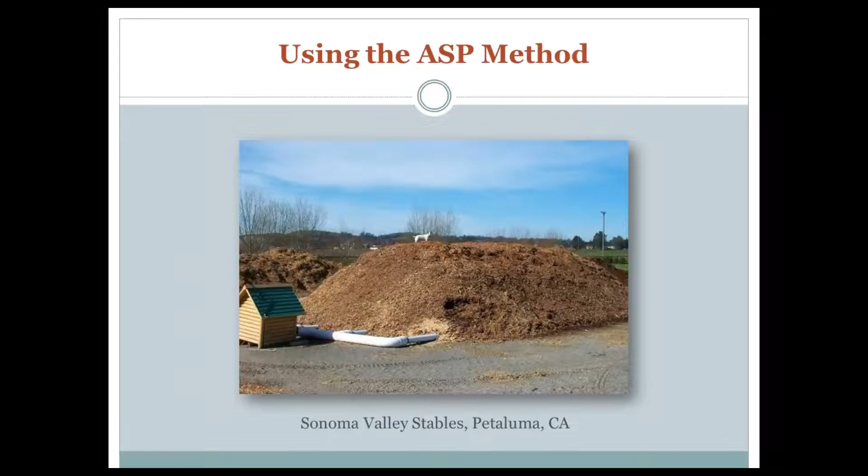The photo you see here is a horse farm in Petaluma, 40 horses, manure, and they were able to develop a system that was extremely sustainable. This project took place 15 years ago.

The topics we're going to be discussing in this webinar: the introduction, to answer the question, what is ASP composting? The importance of aeration. We're going to take a look at the anatomy of an aerated static pile, the benefits of ASP composting, and again, each one of these benefits will be discussed in detail in future webinars.

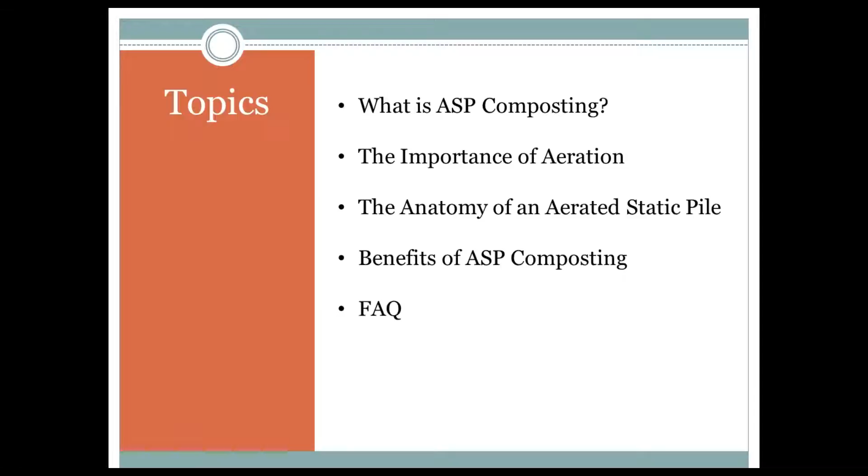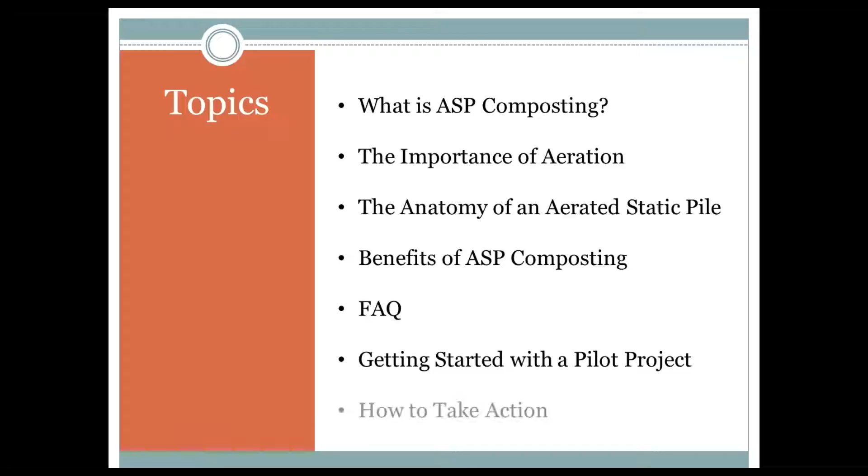We're going to open it up to questions. I'm going to start with a series of questions that I quite frequently get, and then we'll answer questions that those who are attending live might be interested in answers to. What do we do to get started with a pilot project at your facility, and how to take action from today forward?

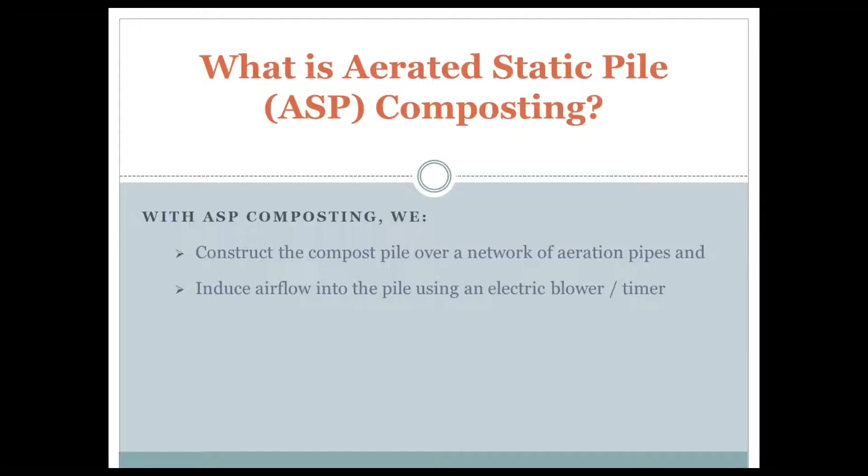So what is aerated static pile composting? With aerated static pile composting, we're constructing a compost pile over a network of aeration pipes, and we're inducing airflow into the pile using an electric blower that is operated by a timer. The timer may be set for 5 minutes every 20 minutes or 2 minutes every half hour, depending on a number of factors. But the idea is that we're cycling air into the pile 24 hours a day, 7 days a week. We do not turn the pile during the first 21 to 30 days, a period we refer to as the active phase of composting.

And we can adjust the airflow to manage the pile temperatures and optimize the biology of the composting process. And finally, we operate the blower using either grid power or solar power.

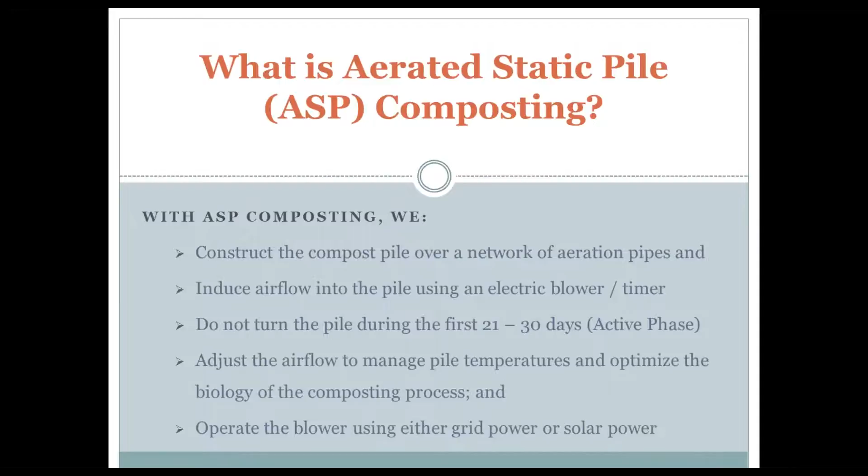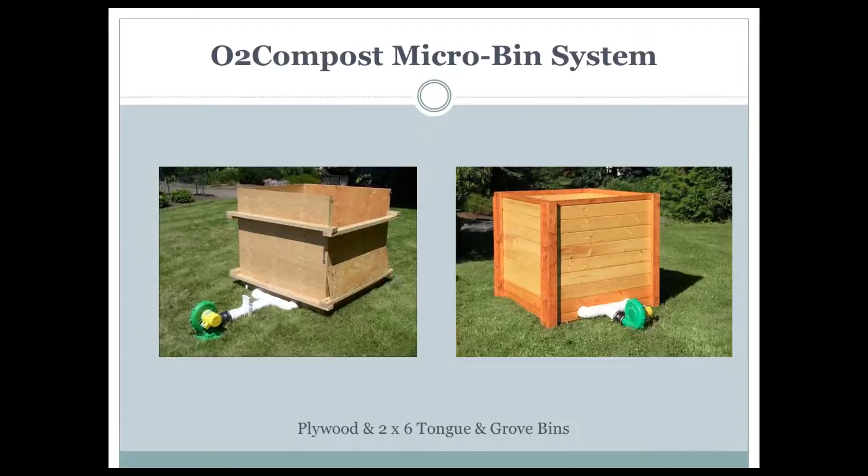The next series of pictures are of different scales of operation, starting with our smallest scale, what we call a micro bin. These are 4 by 4 by 4 foot boxes, 2.5 cubic yards each, and these are excellent for prototyping different mixes. So if, let's say you're a yard waste compost facility, but you're interested in taking in food waste, this is an excellent way to test different recipes and different mixes before you go to a full-scale operation.

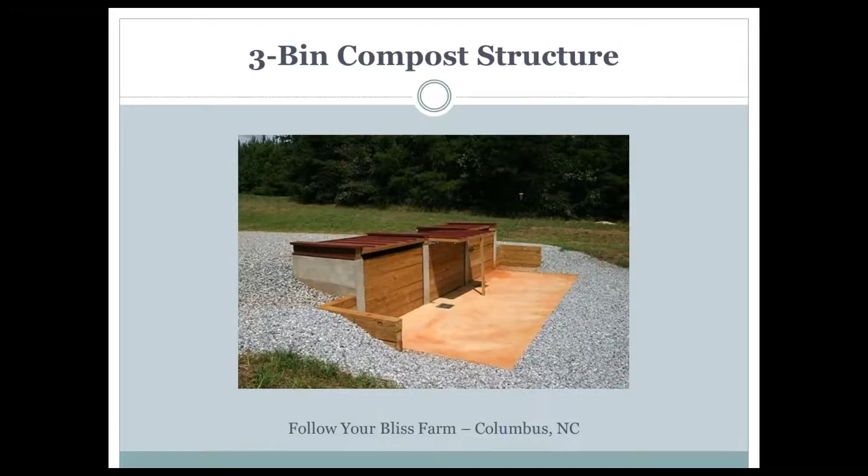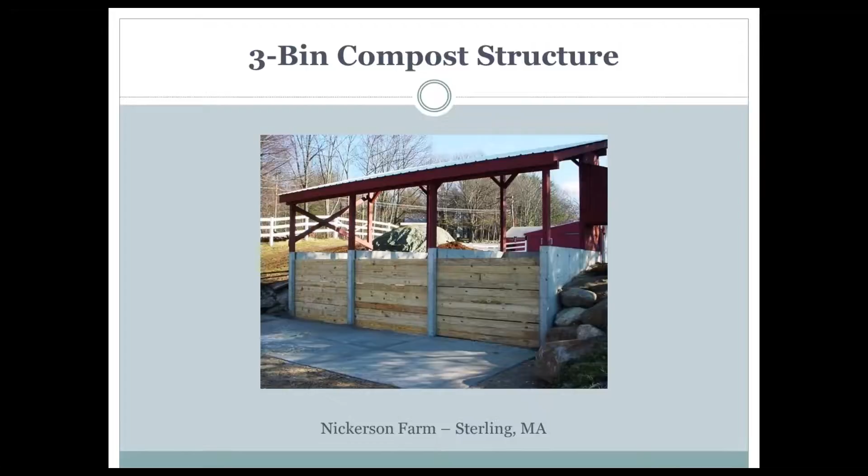This is a somewhat larger system, not portable like the micro bins, but rather built in. This is a horse farm in North Carolina, 3 bins all operated from the same blower with a series of valves to direct the airflow to the bin that we're currently composting. Similarly, a top-down system built in Massachusetts, again a horse farm, been operating for 8 to 10 years at this point.

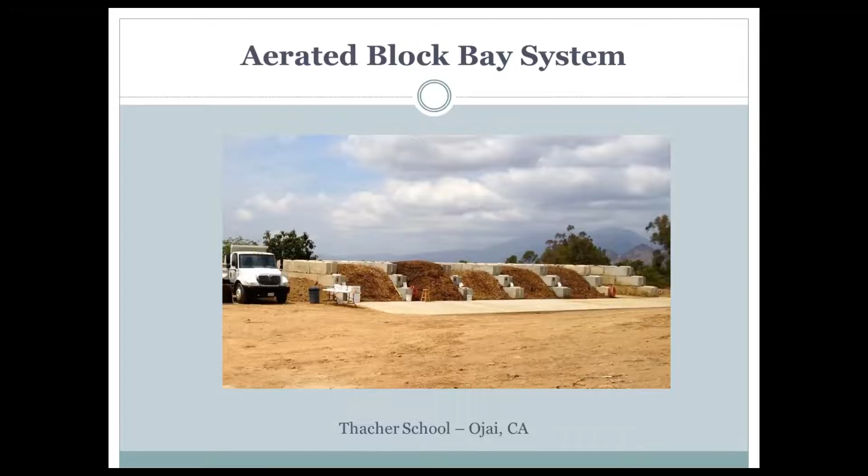This is what we call a block bay aerated system. This is a high school in Southern California where the students are resident to the school. They each have their own horse, and they're composting manure and food waste out of the cafeteria. This is a solar operated system.

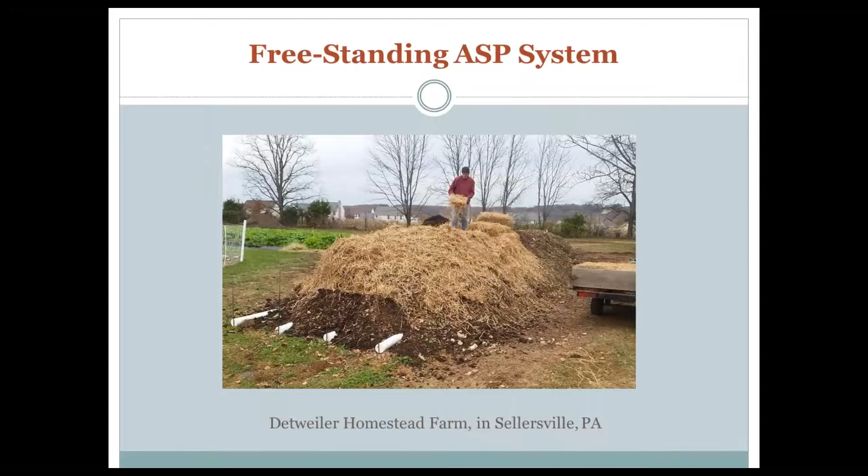Looking at a freestanding aerated static pile, this is a project in Pennsylvania, 4 pipes, and this is very, very similar to a prototype or a pilot scale project that you might construct at your facility. Working our way up in scale, this is an extended aerated static pile where we have 3 blower zones.

Each blower feeds air into a manifold and six lateral pipes. I'm going to talk about the type of pipe here in a moment.

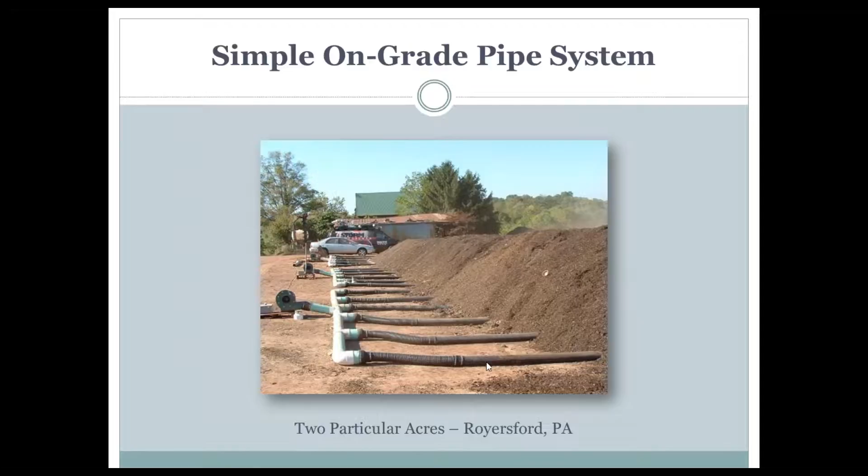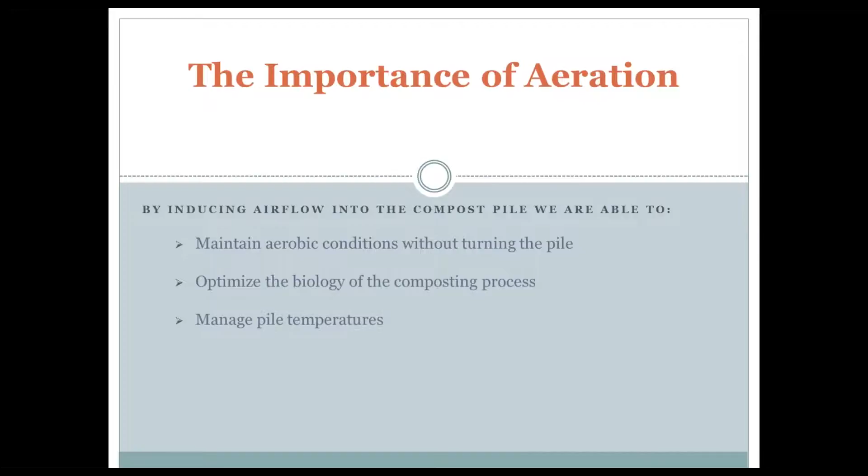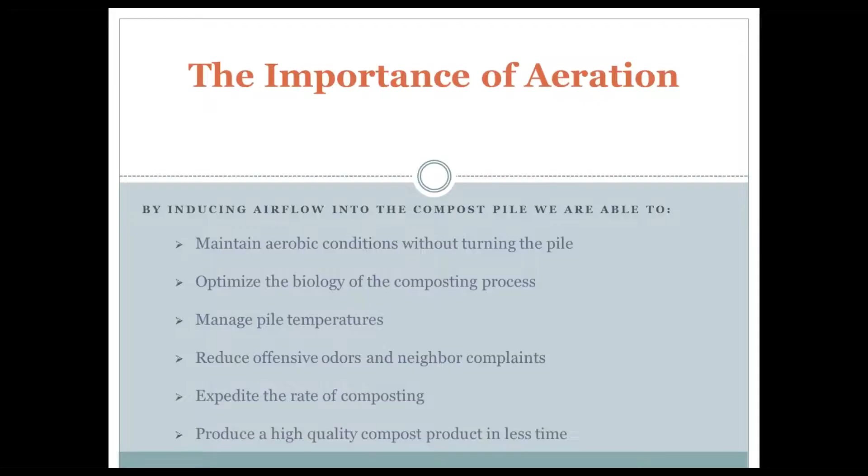So, the importance of aeration: by inducing airflow into the compost pile, we're able to maintain aerobic conditions throughout, without turning the pile. This saves us a tremendous amount of time and effort. We're able to optimize the biology of the composting process and manage pile temperatures within a desired range to really optimize the process, reduce offensive odors and neighbor complaints, greatly expedite the rate of composting, and produce a high-quality compost product in less time, typically with higher value.

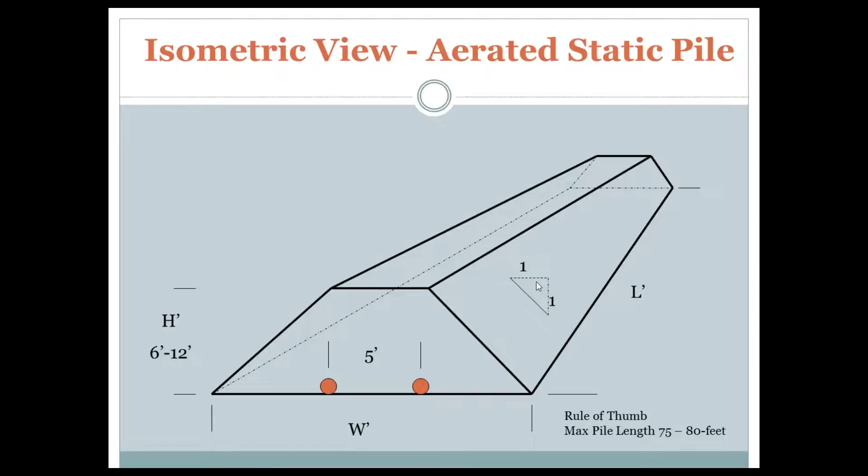Looking at the geometry of an aerated static pile: we have the pile width, which can vary greatly, pile height typically 6 to 12 feet, and pipe spacing about 5 feet. The pile length we try to limit to 75 to 80 feet, to make sure we're getting uniform airflow over the full length of that pipe. Generally, we consider the side slopes of a freestanding pile to be about 1:1.

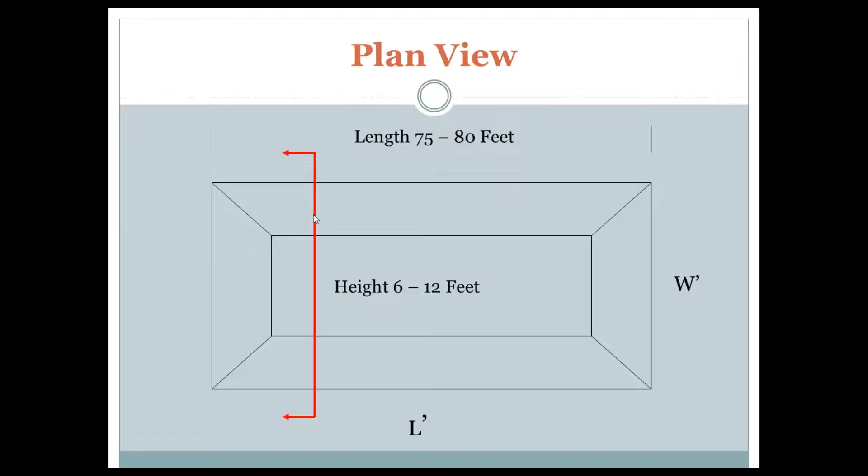Looking down on this same pile, we see the inner rectangle, which represents the top of the pile, and the outer rectangle, which is the base of the pile, or the toe, where it contacts the ground. In between are our side slopes. This red line represents a cross-sectional view of the pile—imagine we've taken a slice and moved part of that pile away.

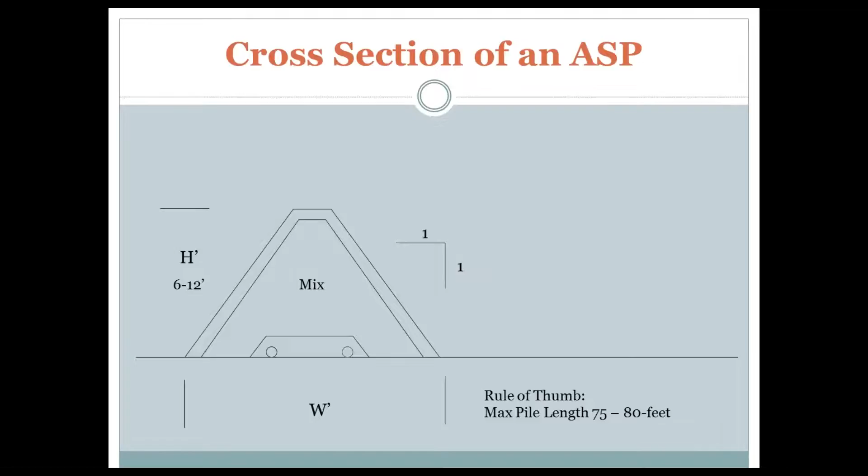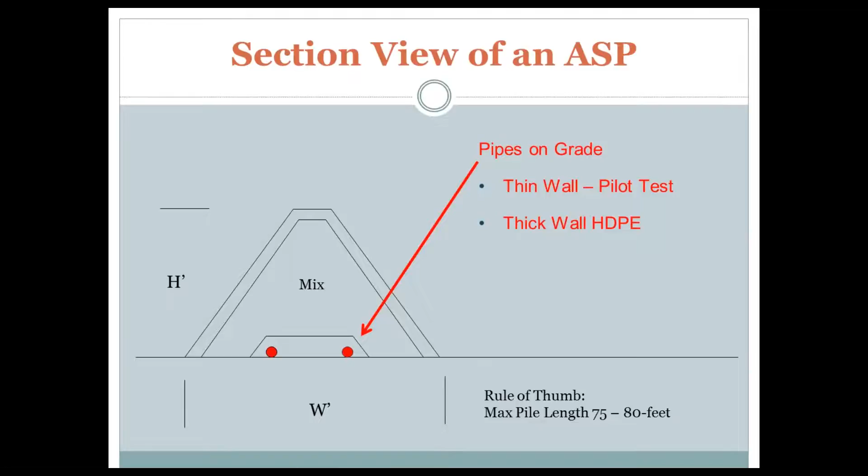There are several component parts, beginning with the pipes themselves. For a pilot project, we typically use thin-wall, perforated and solid pipe—anything you can get, 4-inch material from Home Depot or your local hardware store. When we go to a full-scale, long-term operation, we recommend thick-wall HDPE pipe. It's much more durable and will last for years and years.

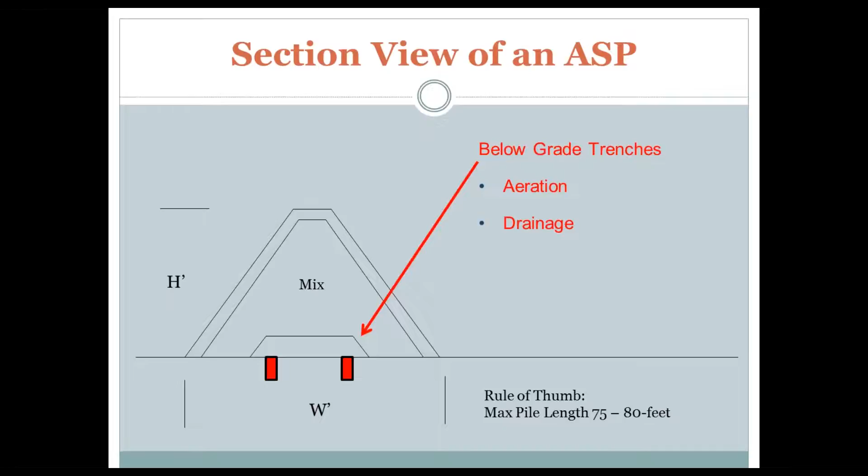An alternative to pipe-on-grade systems is trenches built into the concrete slab. There are many advantages to trenches—in particular, you're not handling pipe—but in designing this system we need to consider that they must provide both aeration and drainage, should excess water come out of that mix of materials. These are not maintenance free; they need to be cleaned out between pile intervals, and the trenches themselves need to be cleaned every 6 months or so.

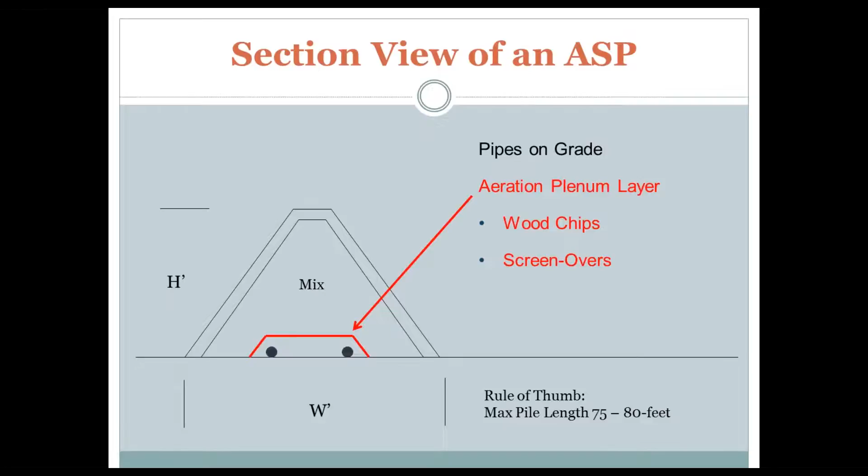So looking at a pipe-on-grade system, we want to place an aeration plenum layer over the top of those pipes, typically consisting of wood chips or screen overs. This serves as a means of distributing airflow uniformly across the base of the pile.

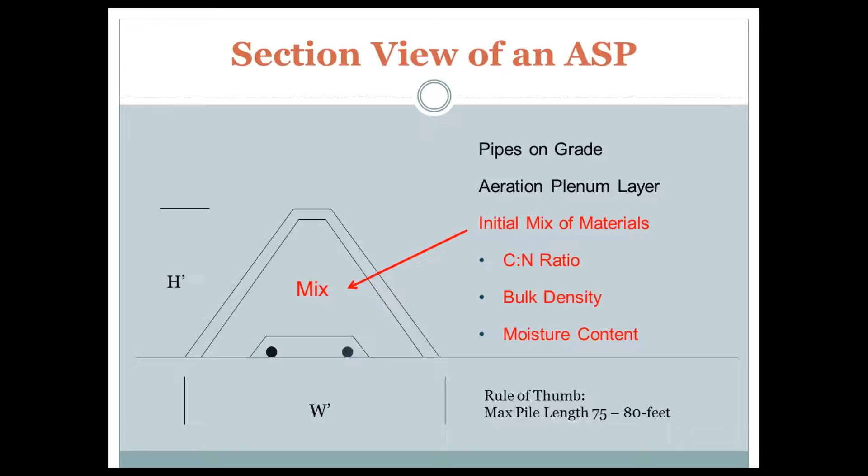Over the top of the plenum layer, we place our compost mix. We'll discuss this in much greater detail in future webinars, but in short there are three component parameters we're looking at. The first is nutrient balance, often thought of as the carbon to nitrogen ratio of the mix. The second is the bulk density of the mix, an indirect measure of porosity and our ability to push air up through the pile. The third parameter, moisture content, is in my opinion the most critical of the three. We want a moisture content of about 60 to 65% in the initial mix, because we'll be losing moisture during that first 30 days, and we want sufficient moisture for the composting process to continue without stalling out.

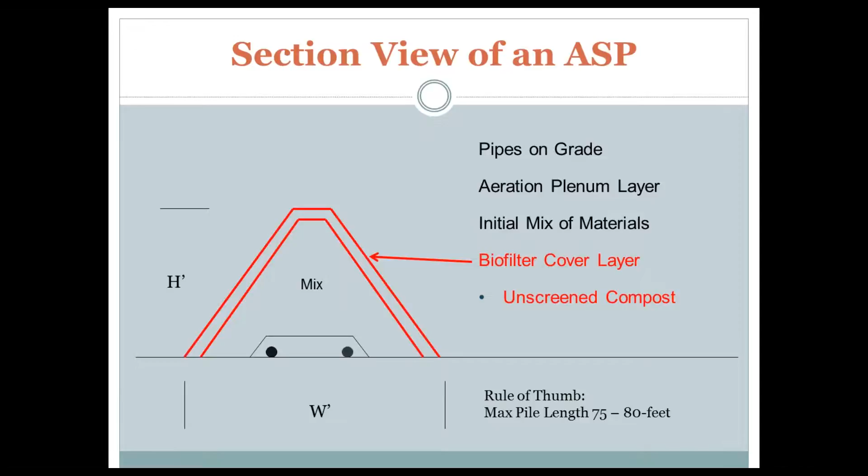Over the top of the mix, we place a biofilter cover layer. Generally, I recommend using unscreened compost. Ultimately, when we break that pile down, we're going to be mixing that layer in with the other composted material, and there's really no point in screening it and going to the cost and effort of doing that prior to using it as a biofilter cover.

Taking a closer look at the biofilter cover, there are four important reasons for this layer. First, it serves as an insulating layer so that all of the materials in that raw mix reach pile temperatures sufficient to destroy parasites, pathogens, and weed seeds. General parameters are 131 degrees Fahrenheit for a minimum of 3 days, and this goes all the way to the outer surface of that initial mix of materials. This is referred to as a process to further reduce pathogens, or PFRP.

Equally important is that the layer serves for odor control through biofiltration. Any volatile organic compounds, ammonia, or greenhouse gases wanting to escape off of that raw mix will get absorbed in that one-foot layer of finished compost, and they will get treated in situ by the microorganisms that reside in that layer. The net result is a very mild, fragrant, organic odor that comes off of the pile, not strong nor offensive to neighbors.

The third reason for the layer is nutrient retention. For example, ammonia, which is a nitrogenous gas, gets absorbed in that layer. It's very efficient—it gets treated, and that nitrogen is retained in the finished product, which helps product value.

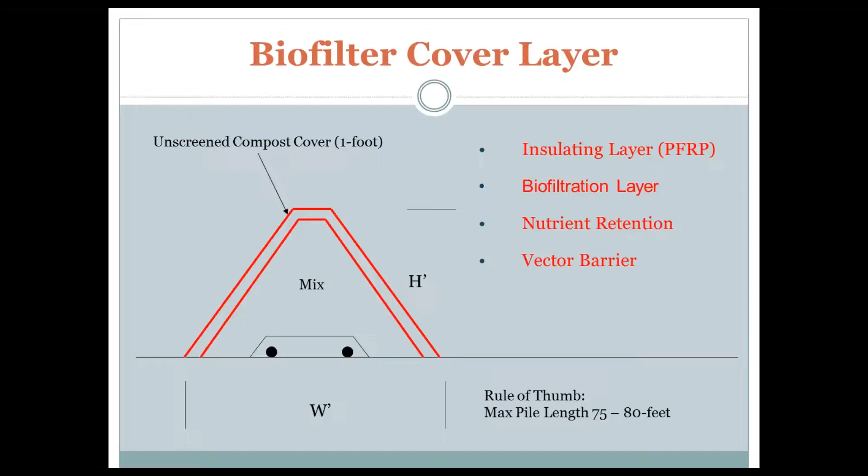It also serves as a vector barrier, so if flies are a problem, or birds, rodents, even larger wildlife—we've had instances where bears and coyotes have expressed interest in what's in that pile. When they dig into that pile, they'll find very quickly this sucker is hot, and they can't go any further.

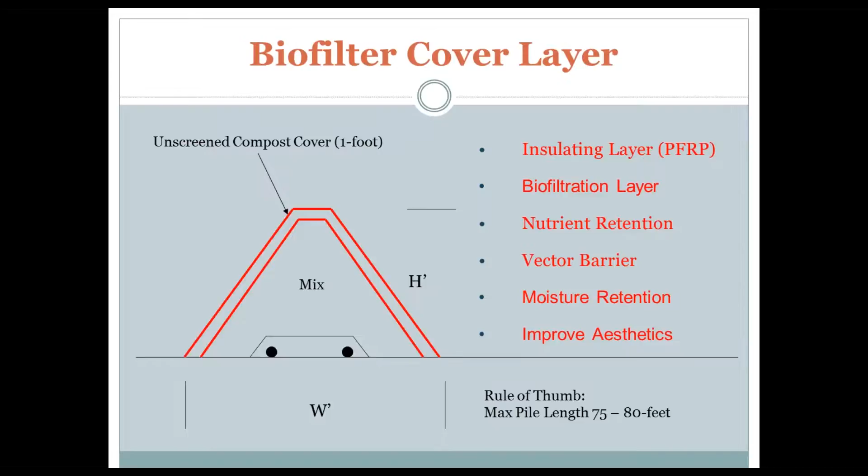It also helps with moisture retention. I mentioned earlier that moisture management of a compost pile is critical to maintaining the biologic process throughout the active phase of composting. And ultimately, that outer layer of finished compost helps improve the aesthetics. There's a saying in the composting industry: people smell with their eyes. If they're looking at an ugly mess, they will sense that and experience it as odor. So we want a nice, tidy site, and this helps tremendously in that regard.

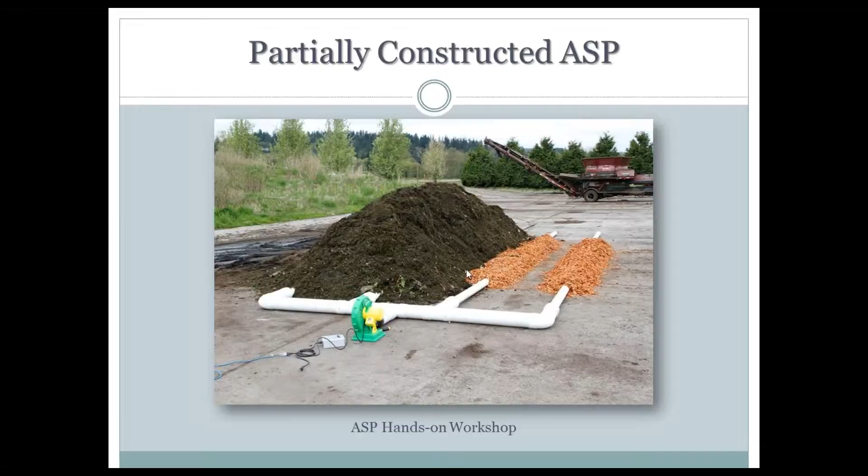This is a picture of a partially constructed pile from one of our hands-on workshops here in Snohomish, Washington. You see the blower and timer, a simple manifold of solid pipe. These are lateral pipes, and the perforated zone is covered by wood chip plenum material. The green grass and shredded yard waste represent the mix itself. Because we're in the process of constructing the pile, there is no cover layer at this point in time.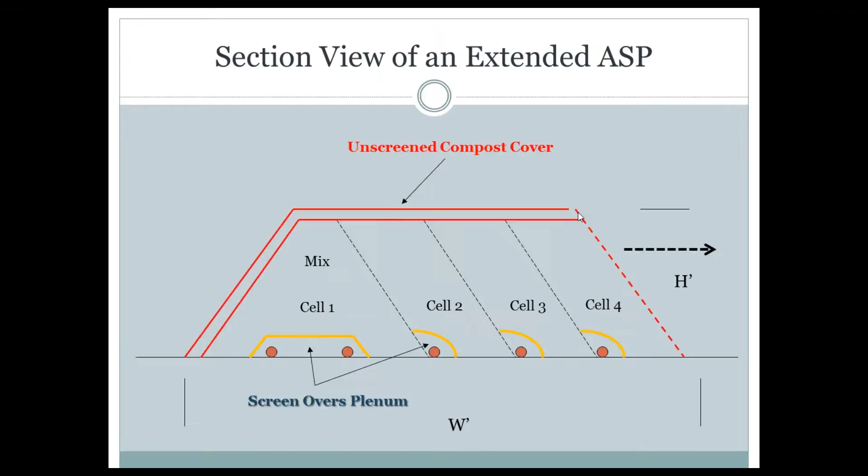Now, using that same example—this being the aerated static pile—we can add pipe and plenum material and additional mix over the top and progressively make the pile wider and wider. This is referred to as an extended aerated static pile. As we're building the pile, we're also extending the cover, because our reach is only limited by the loader or excavator we're using to apply that material.

This is an example of a facility in California, a grape pomace compost facility. Each of these piles measures 80 feet in width, about 550 feet in length. They're about 12 feet tall when first constructed, and there are 10 blower zones in each of these piles. Each pile has about 25,000 cubic yards in it.

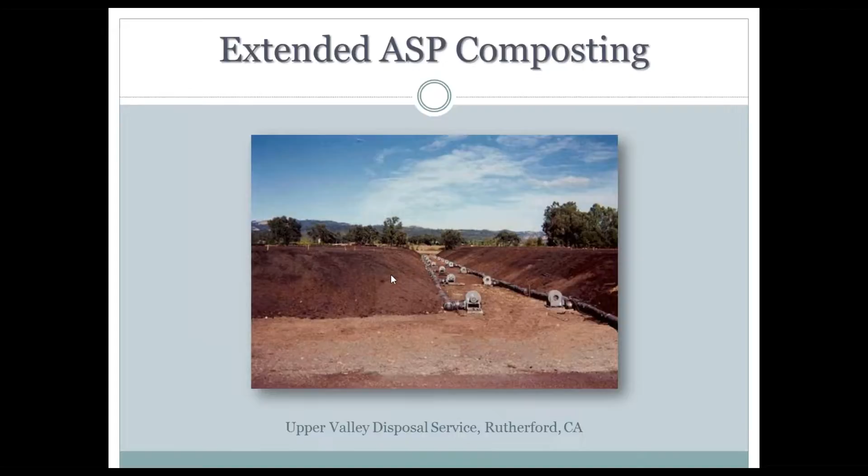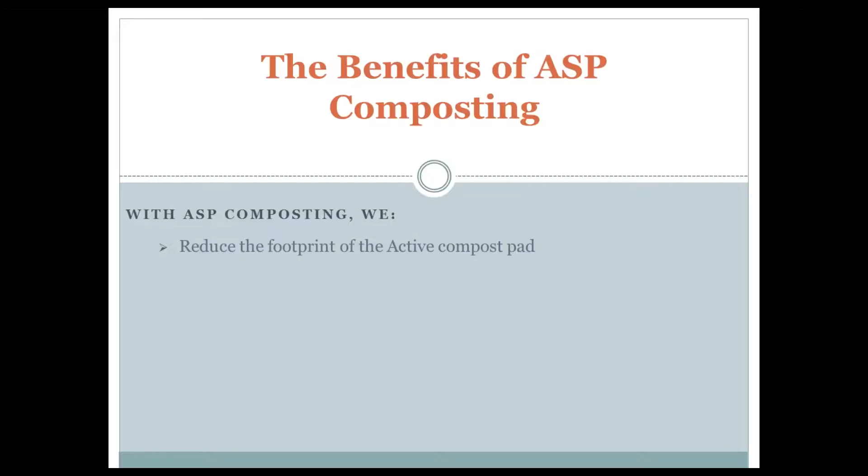So, what are the benefits of aerated static pile composting? With ASP, we're able to reduce the footprint of the active compost pad. Typically, if you're using a windrow turner, we can reduce it anywhere from 3 to 6 times, depending on the type of equipment used. By doing that, we're also able to increase site capacity as well as throughput on a given facility. We're able to resolve off-site odor impacts and neighbor complaints, and reduce the cost of processing because we're using less equipment, labor, and fuel during the active phase of composting.

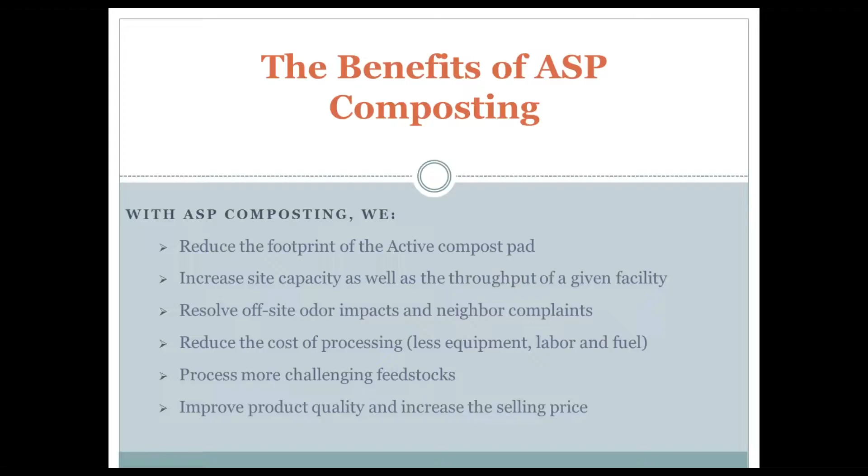We're able to process more challenging feedstocks. A lot of the facilities we work with have traditionally been yard waste systems, but now they're taking in food waste, biosolids, or other more challenging and odorous feedstocks, and we're able to manage those odors quite effectively. We're also able to improve product quality and increase the selling price of the finished compost.

Let's look at some frequently asked questions we get, especially in the training classes I offer. How do we get the pipe out from beneath the pile? With thin wall pipe, it's usually considered sacrificial, but when we try to recover it, we can scalp the pile and do some hand labor to dig it out and pull it out from the pile. Thin wall pipe, because of the heat of the system, tends to become oval over time, and you may get one, two, or maybe three uses out of it before it needs to be replaced.

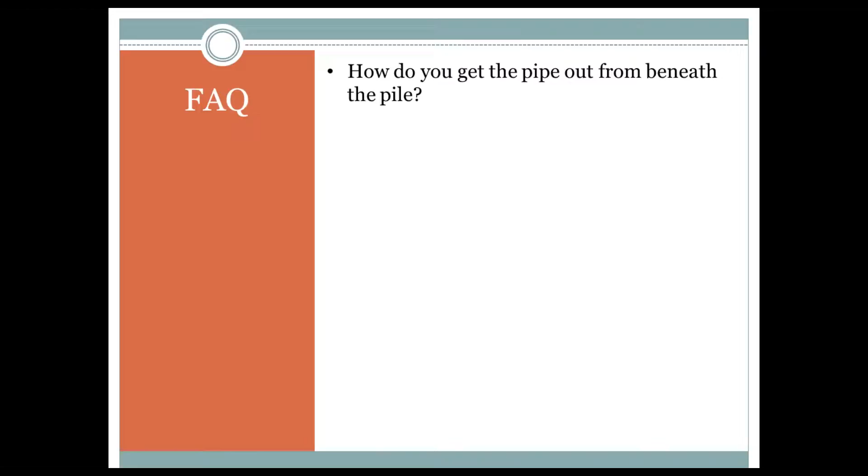For long-term permanent systems with pipe on grade, we recommend using thick wall HDPE pipe, high density polyethylene pipe. With that, you can literally chain up to it with your equipment and pull it out of the pile, much like you would pull a cork out of a bottle.

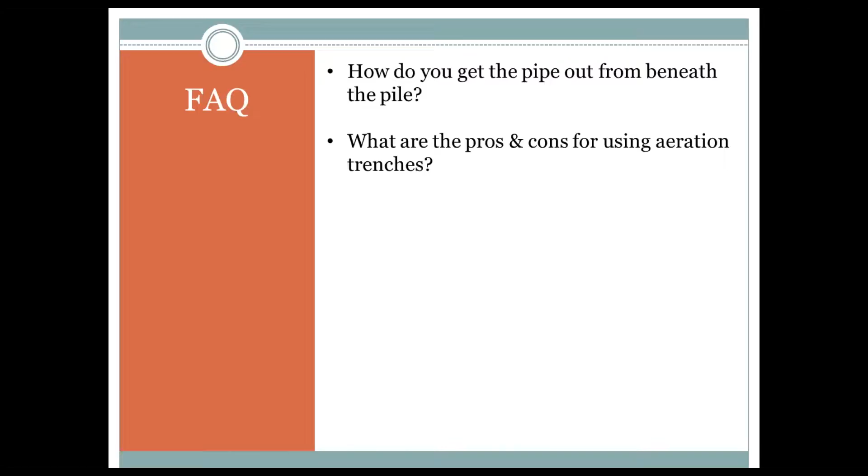What are the pros and cons of using aeration trenches? Certainly not having to deal with pipe after the fact is a nice thing, because that is something you have to handle. However, as I mentioned earlier, trenches serve both to deliver air into the system and as drains, so that drainage system needs to be designed, constructed, and maintained. That's not an easy thing to do.

What is positive versus negative aeration? This is something I haven't really addressed yet, but positive aeration is when we are pushing air into the pile.

I subscribe to positive aeration for a number of reasons I'll mention shortly. Negative aeration is when we're pulling air through the pile.

With positive aeration, it's fairly simple. We're just pushing air up through, and we size the equipment to manage the density of the material and the aeration requirements of that pile.

With negative aeration, you're pulling air from the pile, and that airstream is going to be extremely hot, whatever the pile is, 150, 160 degrees perhaps.

It's also going to be saturated with moisture, such that when that airstream begins to cool to ambient temperatures, a great deal of water or condensate will fall out of the airstream and end up in the discharge pipe, and that needs to be managed.

That condensate tends to be odorous, and it tends to have an extremely low pH. It's very acidic, so it's hard on equipment.

For that reason, we need specialized equipment, stainless steel perhaps, or fiberglass reinforced plastic equipment, and it needs to be larger because it's more difficult to pull air through a pile than it is to push air through a pile. What size blower do you use?

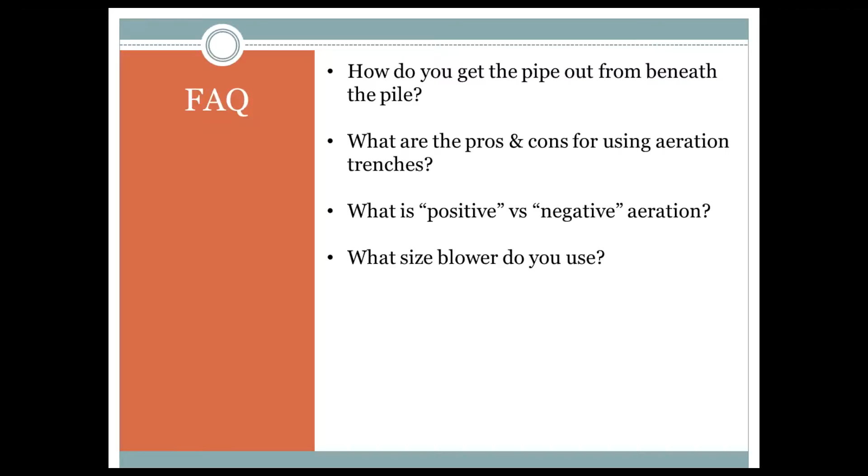It depends on a number of factors: the size of the pile, the energy in the pile, the bulk density, and the difficulty of pushing air through the pile. This is something we would help you determine in the pilot phase of your project.

If the ASP method is so effective, why isn't everyone already composting this way? This is a good question, and quite honestly not one that I can answer very easily.

ASP composting was first developed in the early 1970s in Beltsville, Maryland, and it's in wide use in many, many facilities, but for some reason, the majority of composting operations still subscribe to the turned-windrow method.

And these are folks that we work with quite often for a number of reasons, odor, capacity, and so forth, and help them convert over to an ASP system.